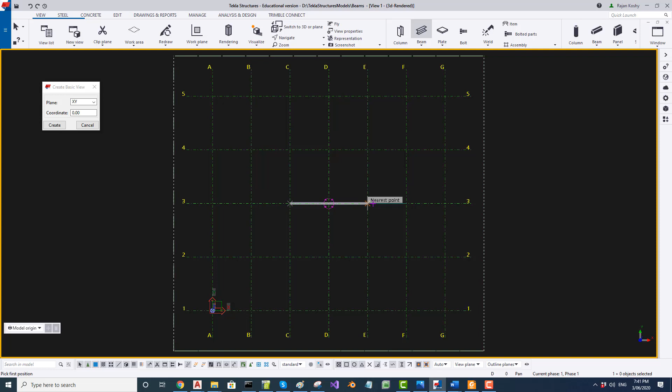I click Control and P and I get a normal view. And I'm going to draw a beam here. So I go Beam and Beam. So here is one beam.

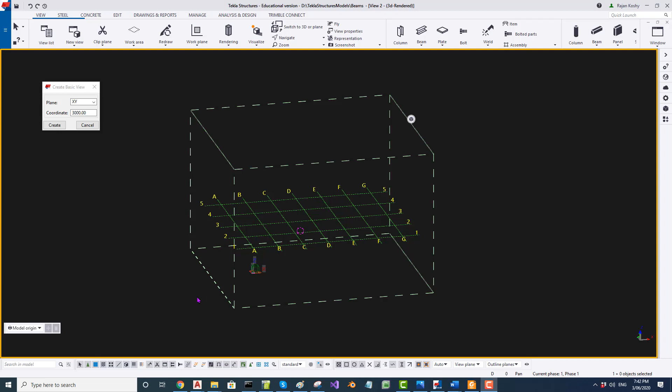Now I'm going to create another view parallel to XY plane at a coordinate of 3000. So 3000 will be the Z value because we are going parallel to XY. So create view. Here is a view. Oh, we are not able to see the first beam we created. That is probably because the view depth is less than 3000. Yes, it's only 1000. So let me increase that to, let's say, 3000 and click on the view.

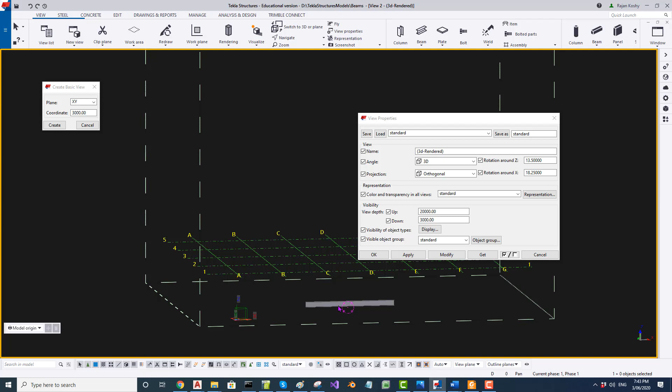See, the view is selected. You can see the border is highlighted, and modify. And now we can see the beam which was created before. Look at the grid line. The grid line is not at the beam. Let's switch to the other view. So this is the other view and you can see the grid line is at that view.

On tiling the view, you can see that this was the first view and this is the second view. You can see on the first view, the grid lines are at 0 and on the new view, the grid lines are a bit above. How can we find out at what RL?

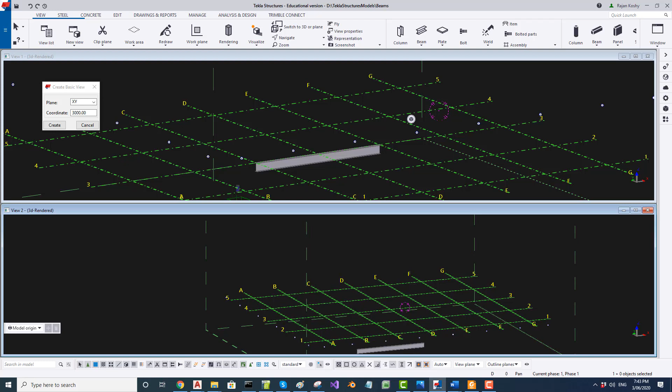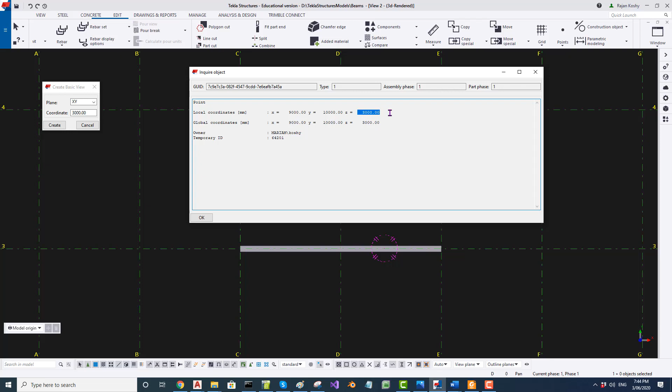To find out the RL, I have switched to Edit View. I'm going to put a point, any position, I'm going to put a point here. And then I'm going to select that point, right click and inquire. The RL is 3000. So I have tiled the view.

Now this is the point we created in this view and see that point is in blue color. But in this view, the point is in red color. Why is that? It is in blue color here because this point is on the view plane. So we opened the view at 3000 and we created a point on that plane. So if the point is on the view plane, the color will be blue.

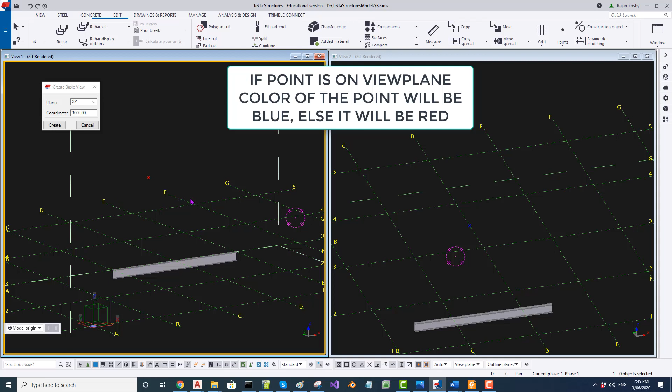But in this window, the view plane is at 0. So you can see the point is not blue, it is red. That's the way Tekla does with points. If it's on the view plane, it will be blue color. If it is not on the view plane, it will be red color.

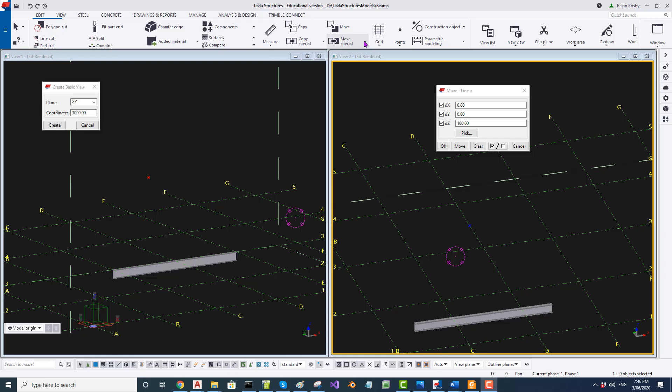I can move this point away from the view plane by, let's say, 100 by going to Edit, Move Special, Linear. And I'm going to select that point. I'm going to move it by 100. And you watch the color of this point. It will turn to red.

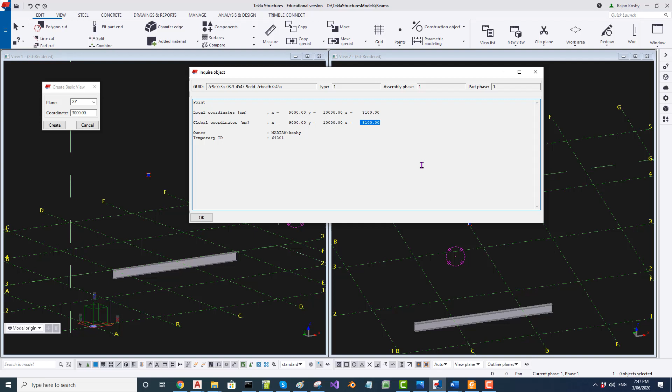See, there's red there and there's red here also. Because now this point is not on the view plane. It's away from the view plane. If I inquire this, it will be 3100 RL. Inquire, 3100. I hope you understand that. This is very important. You need to know on what plane points are.

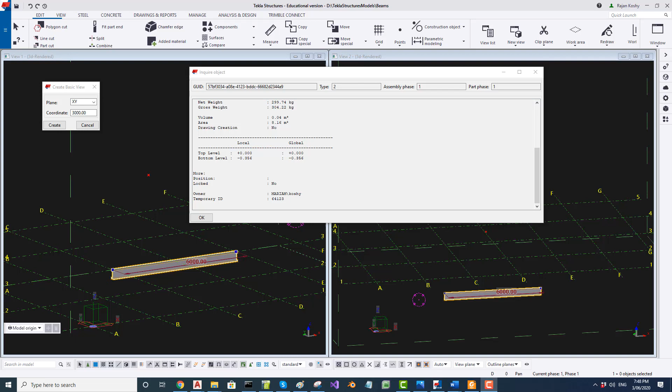Okay, now coming back to beams. So here I opened a new view and clicked 2 points and that beam was created at that particular RL. So if I inquire the RL of this beam, top level is at 0. Now let me create a beam in this view. So what's the left hand side window? The cursor is at the view plane. So if I create a beam here, you can see that the beam is created above this original beam.

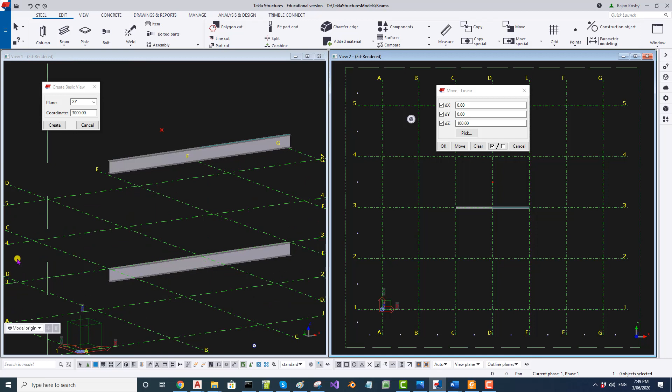This view is at 0. This is at 3000. So the difference in height should be 3000. Let us check by going to view and measure. We'll just measure like that. So it's 3000. Why? Because this view is opened at 0, this view is opened at 3000, and in both views we just clicked 2 points in plan view, and the RL of the beam was defaulted to the view RL.

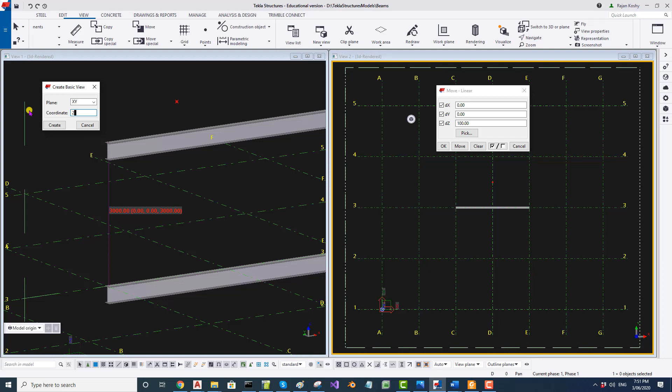This is super important. You must understand this very clearly. Try a few times, put a few beams, and you will get it. Let me open a view at, say, 2000. So here is a view at 2000. So let me draw a beam. I'll turn this a little bit. I'll create a steel beam. So you can see that that's at a different RL.

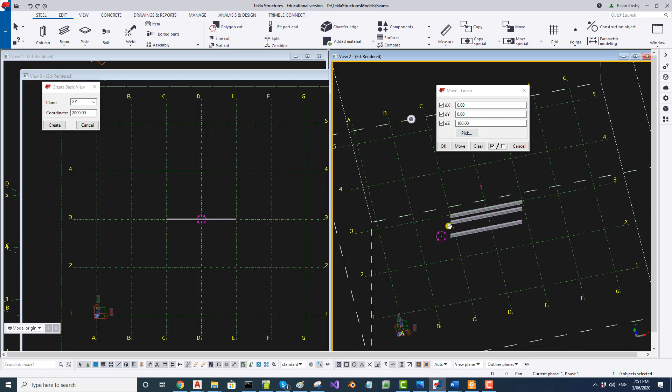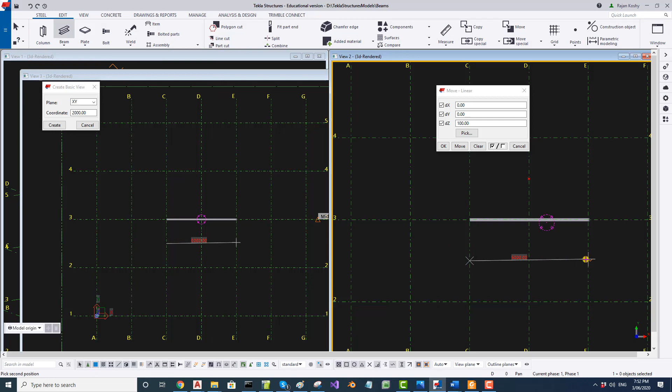So fundamentally, the beams which you draw in plan view are always at that view RL. But you can also draw a beam like that between RLs. For that, you have to tilt the view. If you just draw in plan view, normal view like that, it will go to the default view RL. So if I draw another beam here, it will be at 2000 RL. So you can see that.

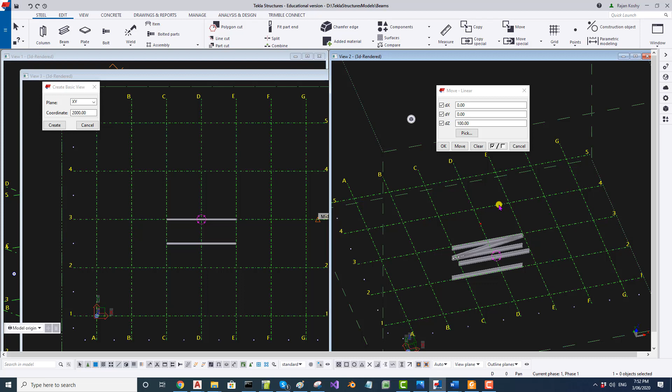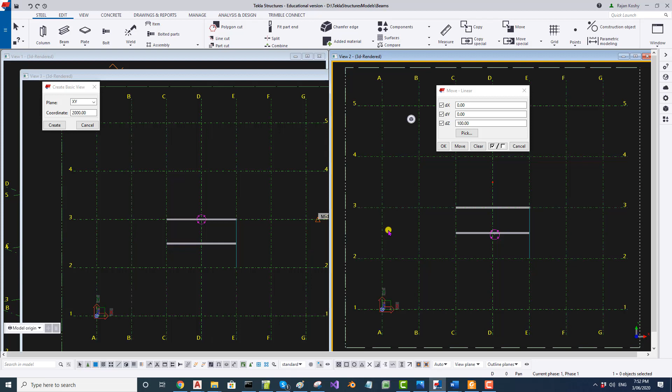Now you have to watch these windows. We'll come to that a bit later. So that's the behavior of beams. It depends on what view you are opening and what the orientation of the view is. If it is like that, then it will draw at the default RL, that is, if the view is normal. Also, it depends on this switch. But the column doesn't work like that. For a column, the top RL and bottom RL are always given, and it does not look at the view RL.

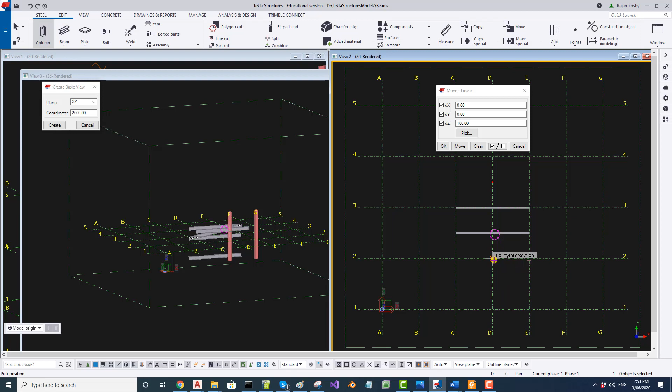For example, if I put a column here, it goes to 0. So it has come from 0. So if I put another column here, that will also go to 0. So it doesn't depend on the view where the bottom and the top of the column is. But if you double click this column, see two fields, top RL and bottom RL. So you can change it here.

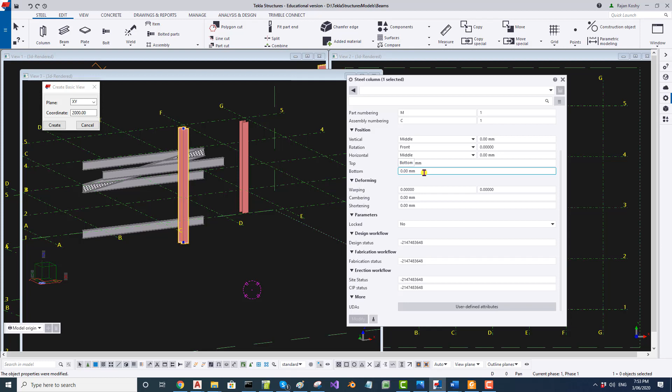So if I change it to 1000 and modify, you can see the bottom RL changing. It's this one. Let me change it to 3000. You can see the bottom RL is changing. You can also double click this one and set it here. So 3000, let me set it to 4000. Hit enter and then create a column here. And you can see that it starts at 4000.

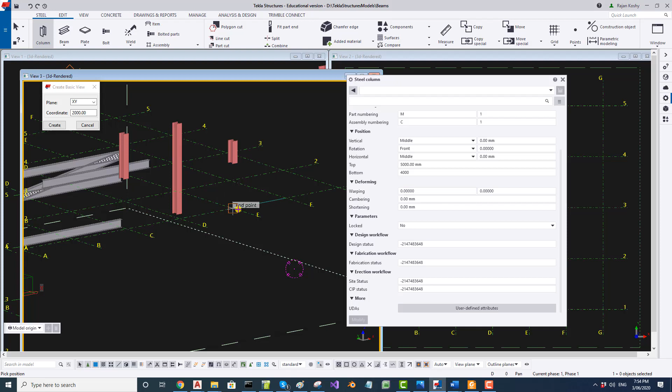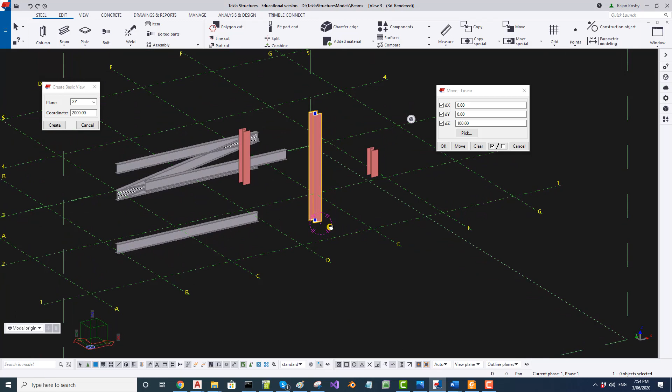If I inquire this one, bottom RL is 4000. Top RL is 5000. This is millimeters. So I suppose how a column behaves is clear, and how it is different to beams is clear. But what we have not covered is this portion, and we will deal with that a bit later.